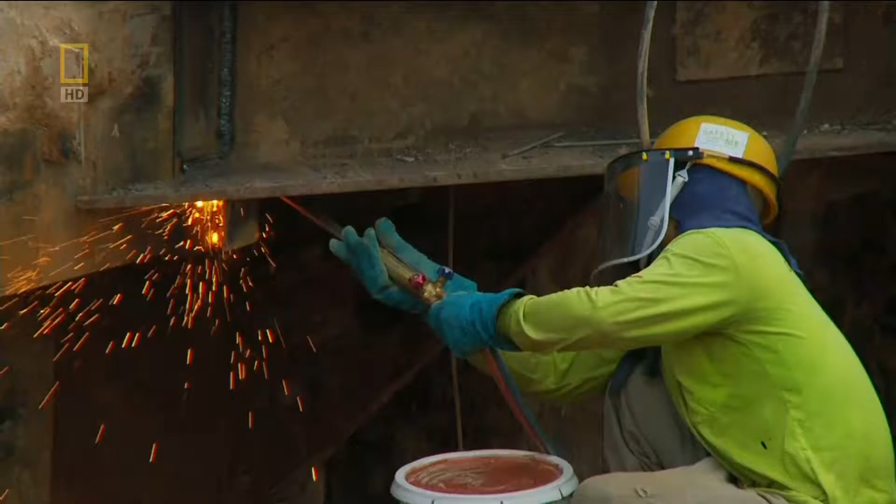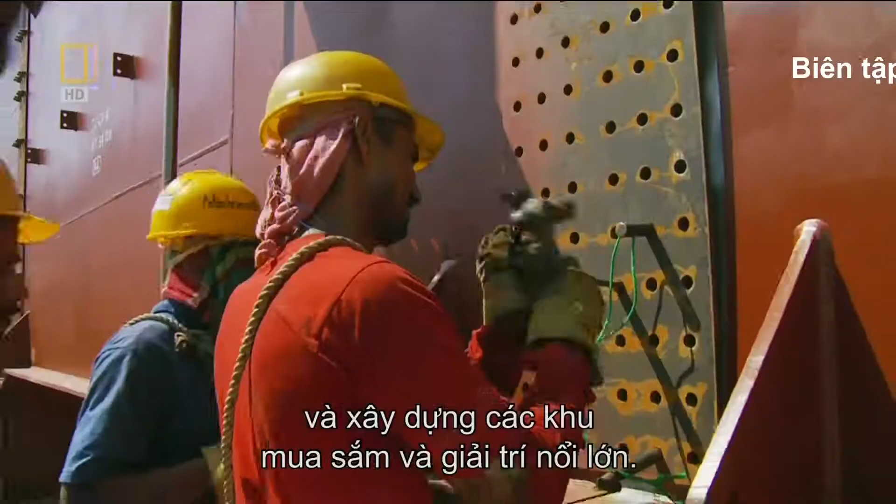Singapore's Marina Bay Sands is one of the world's most complicated construction projects. Engineers have to build not one, but 3 skyscrapers that will shoulder a sky park as big as an aircraft carrier. Worst case scenario, we get stuck. They have to devise ingenious solutions to assemble a 60-metre tall museum of impractical dimensions, install giant artworks, and erect seemingly floating pavilions for shopping and entertainment. If engineers succeed, they will create a virtual city unto itself.

Singapore, the Southeast Asian country, is smaller than New York City. The lack of space forces it to build its largest leisure and entertainment hub to date on a small tract of reclaimed waterfront land.

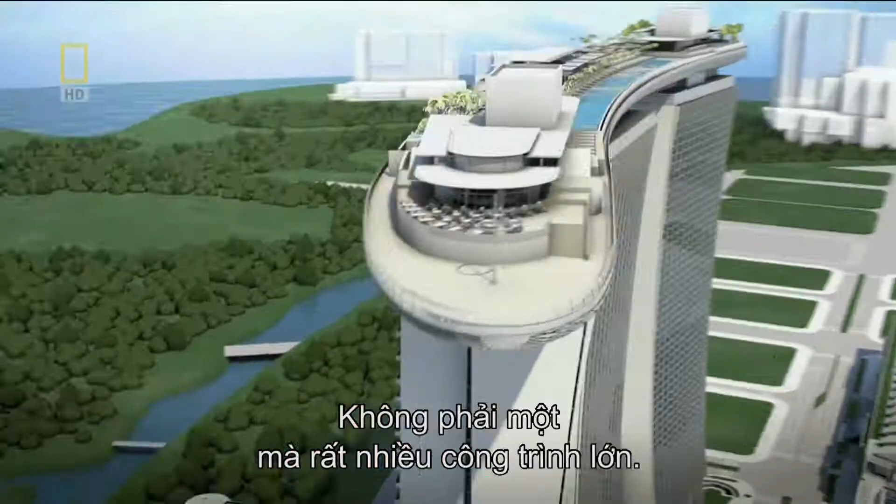The Marina Bay Sands. It's not one megastructure, but many. Serious challenges lie in the array of buildings that form the unique complex.

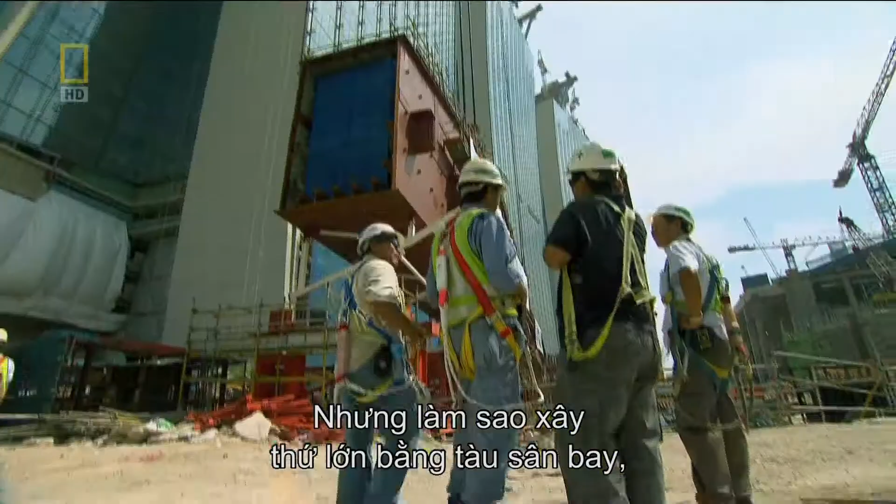3 55-story hotel towers slope at such great angles, they're in danger of buckling under their own weight. An even bigger problem is the hotel's roof. A 340-metre sky park spans its length, containing gardens, outdoor pools, and the world's largest cantilevered observation deck. But how do you build something as big as an aircraft carrier, 200 meters in the air?

In the hotel's atrium, mammoth works of art have to be somehow incorporated into the architecture. Its challenging centerpiece, a 15-ton mass of steel by a renegade artist from Britain.

A 60-metre tall art science museum is designed for maximum visual impact. It will be to Singapore what the Opera House is to Sydney. Only one problem: it seems too impractical to construct.

And a set of dramatic glass-encased pavilions, while themselves posing little challenge, have to be built in water.

The man behind the Marina Bay project understands the risks, but he believes that anything short of astounding will fail. Sheldon Adelson, one of the world's richest men and CEO of Las Vegas Sands Corporation: 'What we hope to accomplish is to change the face of Singapore tourism. So we expect a very successful development.'

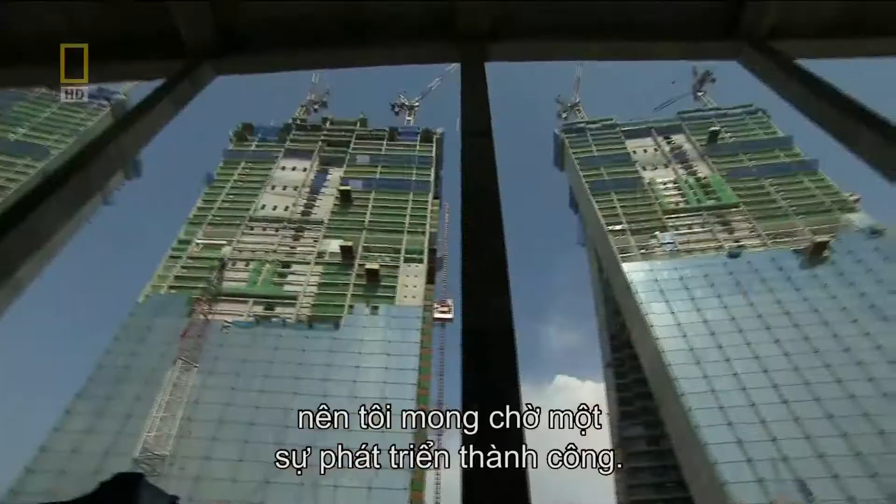That is by far the largest and most expensive single project we've ever undertaken. It'll cost about 5 to 5.5 billion US dollars. It's a lot of money. Now, I know $1 billion doesn't buy what it used to, but by any measurement, it's a lot of money today.

Adelson believes his huge investment is safe in the hands of Moshe Safdie, a world-renowned architect. Safdie is recognized for his use of dramatic curves and geometric patterns. The Marina Bay complex will be his largest and most difficult project yet.

I think that architecture has to be timeless. Therefore, what it espouses, what it provides, needs to be something that has a long life. What's unique about Marina Bay is all the pieces coming together. You can't think about it as individual buildings. You've got to think about it as a piece of city. It's much more a symphony than it is a sonata.

On the ground, engineers are more concerned about the reality of building Safdie's vision. This is the North Retail section area. 30-year veteran John Downs is in charge of overseeing the entire project. The design is very, very diverse, and each component of the project is totally different from the others.

For a project of this size, you'd expect with the planning, with the design, with the construction, you'd be expecting somewhere between 6 to 7 years. Here is basically a 3-year turnaround.

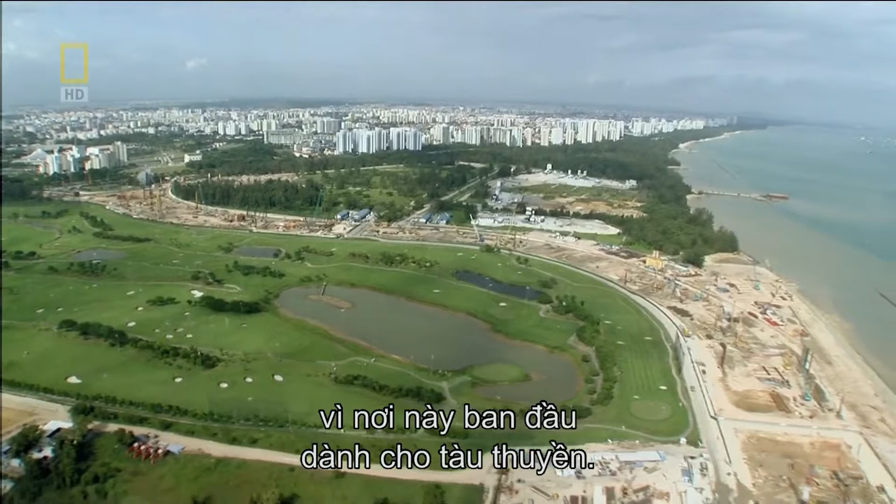The complex sits on 560,000 square meters of reclaimed land, part of a decade-long plan to revamp Marina Bay, a former saltwater estuary that's now a freshwater reservoir.

Beneath the reclaimed land, which is essentially a seabed, is a dangerous layer of marine clay. Sometimes called black toothpaste, marine clay has very poor structural properties. If not given complete respect, the unstable marine clay is potentially fatal.

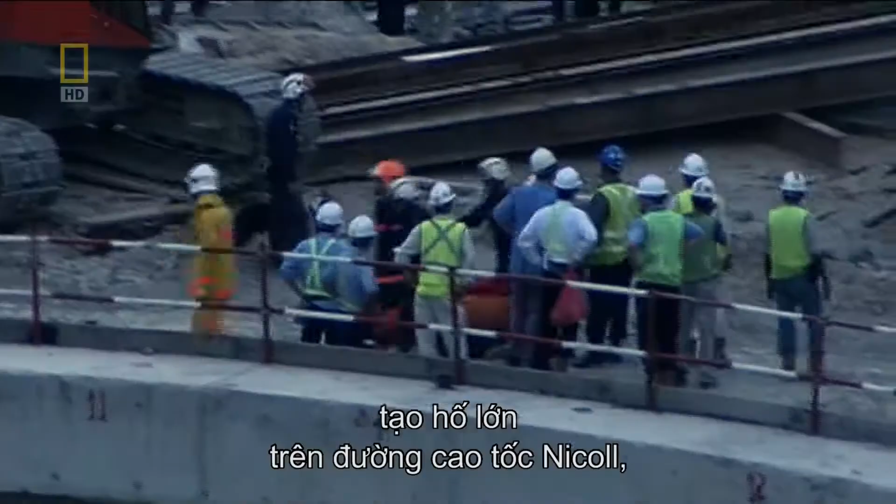In 2004, Singaporeans discovered the lethal consequences firsthand. A routine excavation in an underground tunnel for the mass rapid transit network causes a collapse, creating a gaping hole in the Nicoll Highway, killing 4 workers.

The ground conditions in which they were building the Nicoll Highway were not dissimilar to those in which we are encountering here. They had also soft clay, they had similar depths of excavation between 20 and 37 meters. One of the big things that was learnt in the Nicoll Highway collapse was the importance of monitoring movements and the control of quality as the construction proceeds.

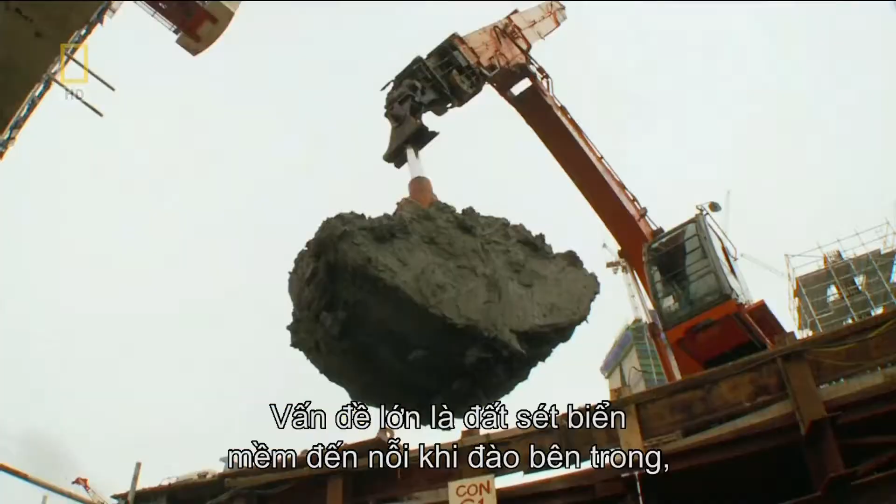Marine clay is an old foe of engineer Mike Barton. He's defeated it in the past by understanding how it behaves. The big problem with marine clay is that it is so soft that when you dig out the inside, the walls will move and potentially collapse and allow all the surrounding water in the bay into the excavation. So, before work can begin, the unstable building site needs major fortification.

To combat marine clay, engineers decide to build giant concrete walls to create stabilizing perimeters for the larger buildings, known as diaphragm walls. Up to 1.5 meters thick, diaphragm walls are steel-reinforced concrete sections, pounded 50 meters into the ground. They form watertight enclosures for men and machines to work round the clock. In just 1 year, over 4,000 meters of diaphragm walls help produce a rock-solid foundation.

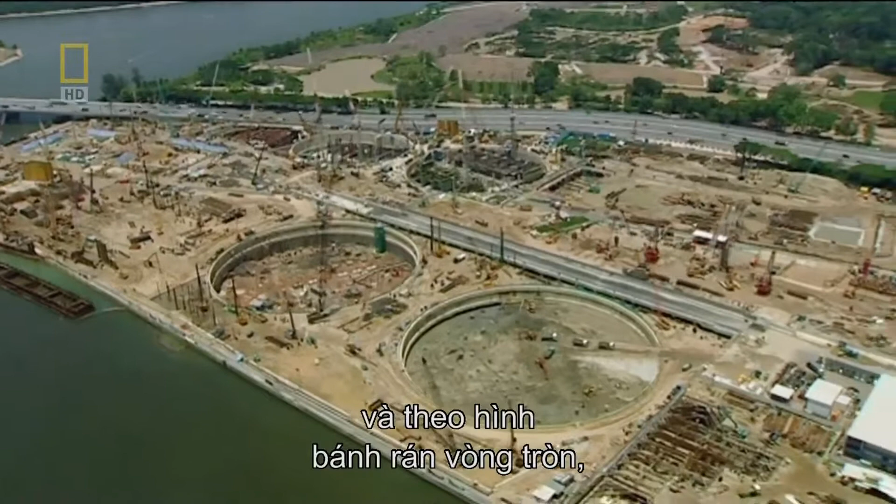The diaphragm walls that we constructed in a formation which we called a peanut formation, which is 2 circles joined together, and a donut formation, which is circular, is that they are able to withstand very, very large forces from the marine clay without any movement. They encapsulate an area that's bigger than a football pitch that enables us to excavate very quickly and to build structure up very quickly.

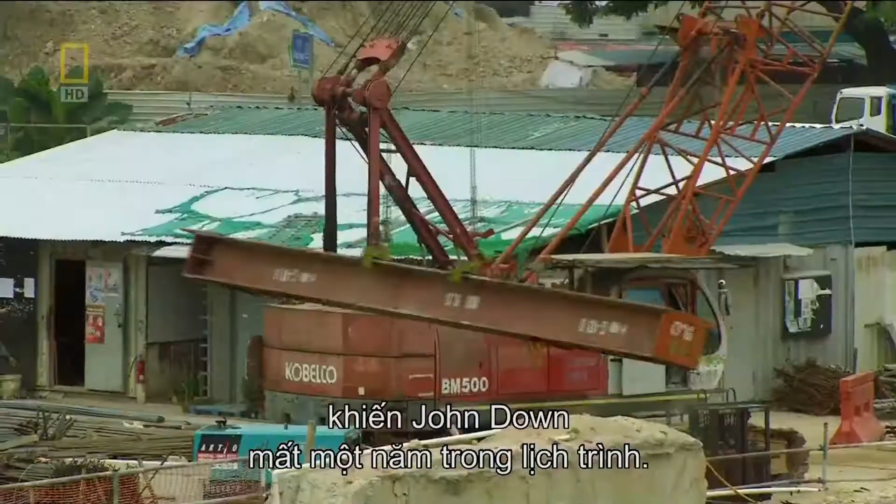Securing the footprint of the Marina Bay project has already taken a year out of John Downes' schedule. He now faces the difficult task of erecting the resort's many buildings in a space of just 2 years. Just managing the whole logistics of that, including the construction methodology, is very, very challenging for us. 1, 2, 3. To meet his tight deadline, Downes chooses the most direct solution. He hires 16,500 workers to construct every single building, simultaneously.

It's like leading a small army. So organizational excellence is key. We're just on the edge of Singapore in the CBD here, so rather than lose the contractors and the workforce to go off-site, we built our own 3-story project office. We have all of our contractors, our subcontractors here. We house our resident site staff. We have our project management team. We have our construction management team, our design management team, and the logistics here.

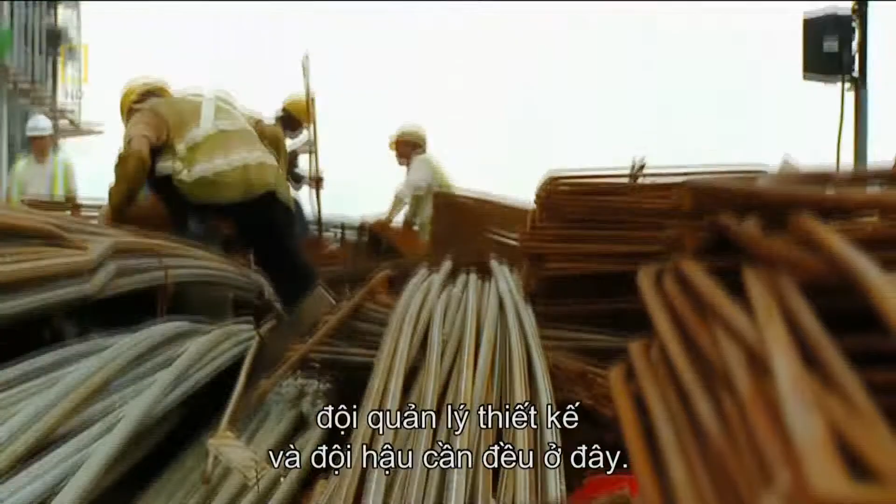The tight schedule also creates problems at the hotel towers, where engineers are already struggling with a congested site. The important thing to do is to make sure that they come in and deliver the goods straight away and then get out again. We don't want too many vehicles on site at the same time. To speed up construction and alleviate traffic congestion, engineers turn to a method that's proven itself countless times in the field: in situ concrete casting.

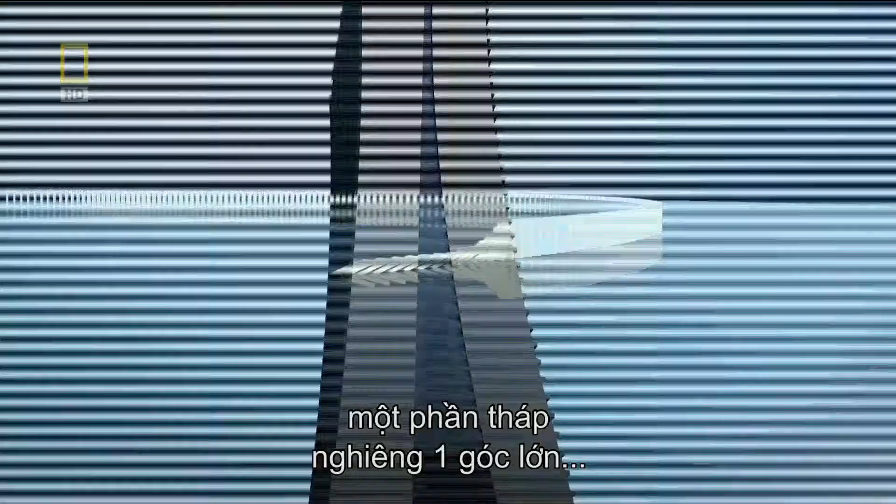Hotel walls are made on site in the thousands. And workers laying the floors are so proficient, they produce 1 floor per 4-day cycle. It's an impressive display for a conventional solution. But the structure they're attempting is anything but conventional. The key challenge of building the hotel towers is its unusual design. Unlike other skyscrapers, part of the towers slope at incredible inclines. Like a set of collapsing dominoes, the towers could buckle under their own weight if a practical building solution is not found.

It's a major concern for engineer Craig Glover. I've been in the industry for 25 years, done a wide range of projects in many different countries, but nothing compares to this whatsoever. There was nothing we could take reference from across the street, on the next high-rise, or across town. This is a new frontier. Costing a staggering $5.5 billion to build, the Marina Bay Sands could be one of the world's most expensive mistakes if engineers can't solve the tower's problematic structure.

Engineer V.C. Cheong leads the design team, and their solution comes out of left field. If you look at the configuration, it's not a straight tower. It's with a sloping leg. So all this sloping leg actually is inducing a very huge external force onto the structure. We kind of built it without any support. So we actually formulate a solution to prop up the sloping edge. Using a technique they've never employed before, engineers build large temporary struts made of strong structural steel. They prop up the sloping towers as they rise.

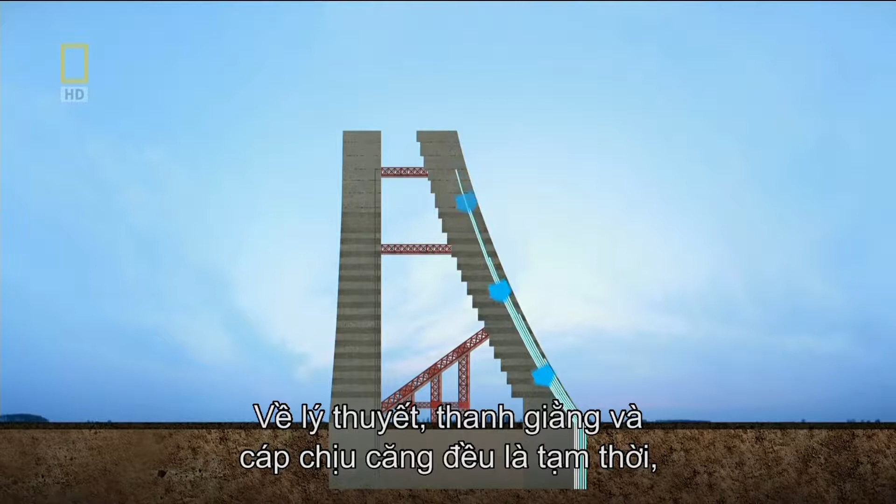Like a suspension bridge, high-tensile steel tendons, also known as tension cables, give an added layer of support inside the walls. In theory, both the struts and the tension cables are temporary and will be removed once giant link trusses connect the towers at the 23rd floor. The sheer weight in concrete is enough to topple the towers at level 8 if the engineers' calculations are wrong. To reduce the chances of failure, Glover and his team make a radical decision. Instead of removing the temporary tension cables in the tower walls, they make them permanent supports.

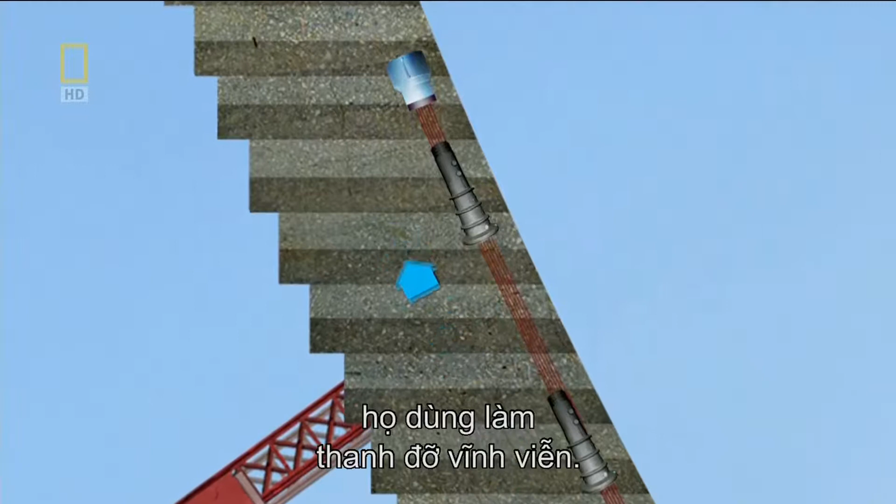I feel good it's in there because it's added strength, it's added support. We have a twined network here of high-strength steel. And what we do is we bundle these up so they form a cord with multiple strands inside this conduit. We place this conduit inside the walls prior to casting the concrete. So what we then do is once the concrete is cast, we anchor one end into the concrete.

So we then put a very high-strength hydraulic jack onto the collar and one by one pull these strands through and tension them up. What that does is basically pull the building back and hold it in place. If these cables were to suddenly break or if they weren't in place, we wouldn't be able to control the self-weight as we build more and more of the building up.

Despite the team's quick thinking, the true test of their engineering decisions will only happen once the main support struts are removed and the massive link trusses installed. Link trusses are huge reinforced steel brackets that bind the towers at the 23rd floor.

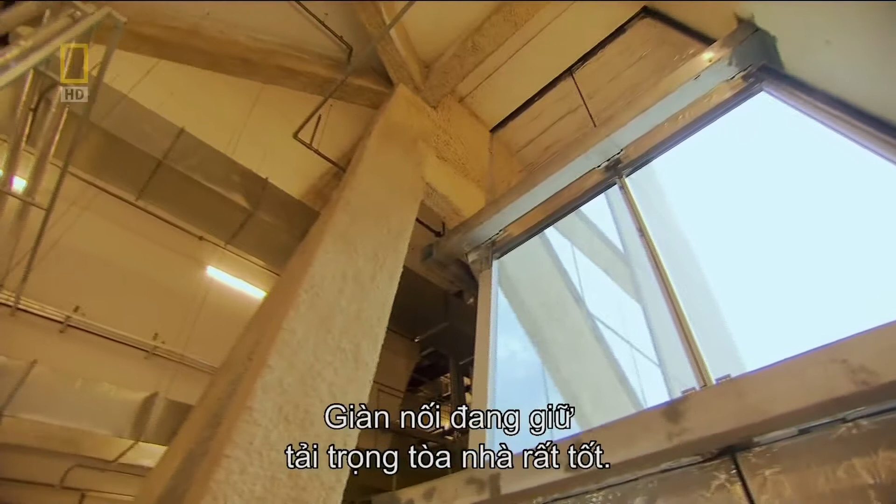Once their installation is complete, they transfer the sloping tower's weight completely away from its temporary struts. Once we're satisfied that we don't have any stability issues, then we can bring the large hydraulic cranes in and member by member start to dismantle the struts. We've got a lot of time pressure, so we've just got to make sure that these things keep moving. As the last pieces of support struts leave the site, Glover and his team can finally breathe a sigh of relief. The link trusses are holding the building load. So far, so good.

Not all the structures have ended up according to plan. The 60-metre-high Art Science Museum is facing a major design overhaul. Planned as a venue for blockbuster exhibitions on the arts and sciences, its bowl-shaped roof doubles as a 3,000-seat amphitheatre. Unfortunately for engineers eager to start its construction, architect Moshe Safdie isn't happy with its current shape. Somebody looked at them and said, looks like a bunch of bananas. In fact, Mr. Adelson said, looks like a bunch of bananas. I said, well, if they look like a bunch of bananas, we're not there yet.

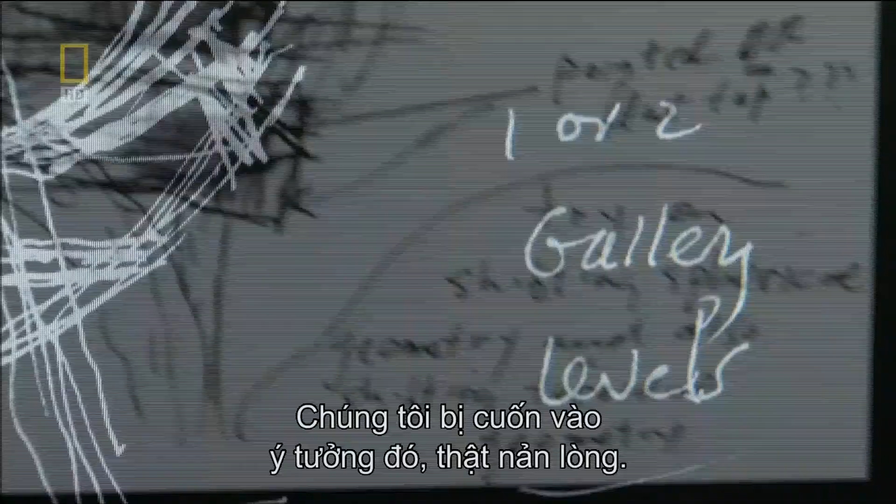It's terrible news for Safdie's design team, especially its principal, Gene Dyer. There are times that Moshe will come in with an idea. We think it's quite exciting. We'll pursue the idea for weeks or even months. He'll come back and say, I want to change the idea. And we've already bought into the idea, so it's a bit frustrating.

To rework the unique geometry and dimensions of the Art Science Museum, Dyer and his team turned to advanced 3D modeling programs. It not only makes navigating the museum's complex geometric patterns easier, it shortens the process to a matter of days. The model is dynamic and it can be moved by just changing one or two elements. Moshe could experiment. He could make rapid judgments in a very short period of time about which way he wanted to take the project. This is a process that was impossible to do 10 years ago. Without the computer, this would take years and years and years.

After months of refining the design, Safdie is finally happy with the result. The mathematical precision that we gave them made them even more beautiful. It led some people to say, well, hand of welcome. Others said, is that a lotus? And the more ambiguous the associations, the closer I thought we were getting to our target. Because I think the least exciting buildings are those which have overt symbolic associations.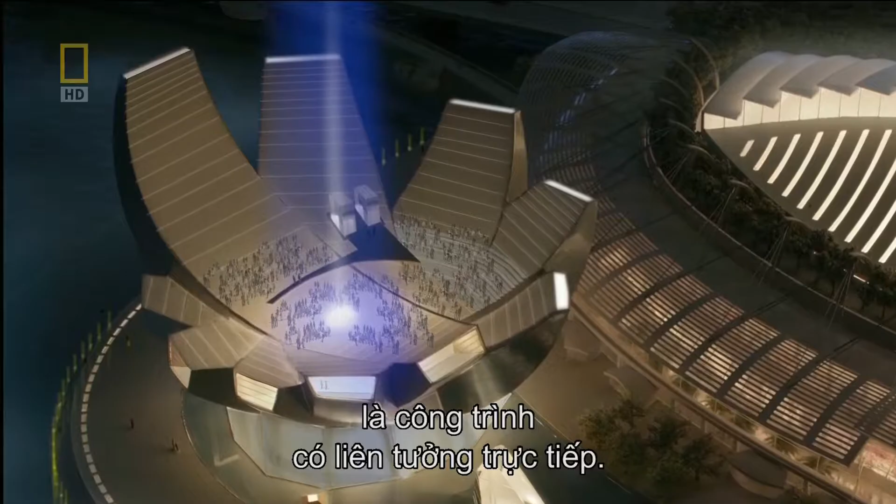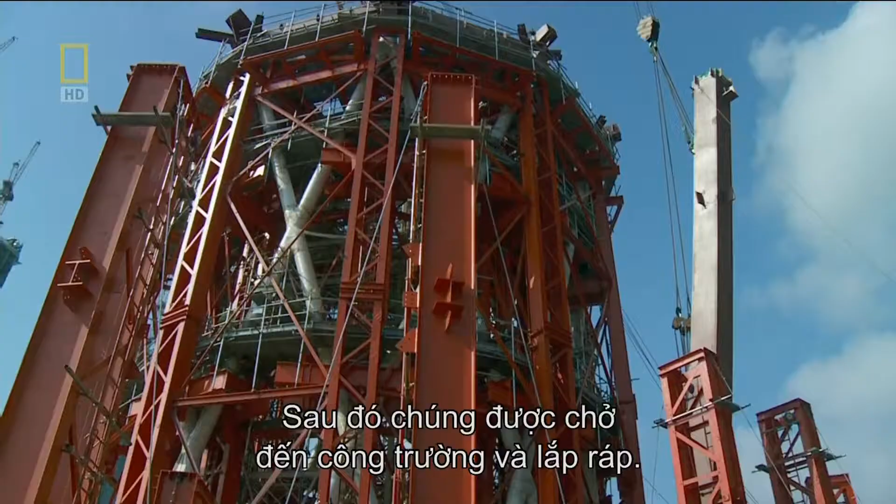Armed with the new design, engineers begin work on the museum's 60-metre-high superstructure. A staggering 5,600 steel elements, weighing some 5,200 tons, are prefabricated to exact specifications. They are then trucked onto site and assembled. It's like putting together a giant jigsaw puzzle. Each element has to be installed with pinpoint accuracy. If it's even a few millimeters off, engineers will have to start from scratch.

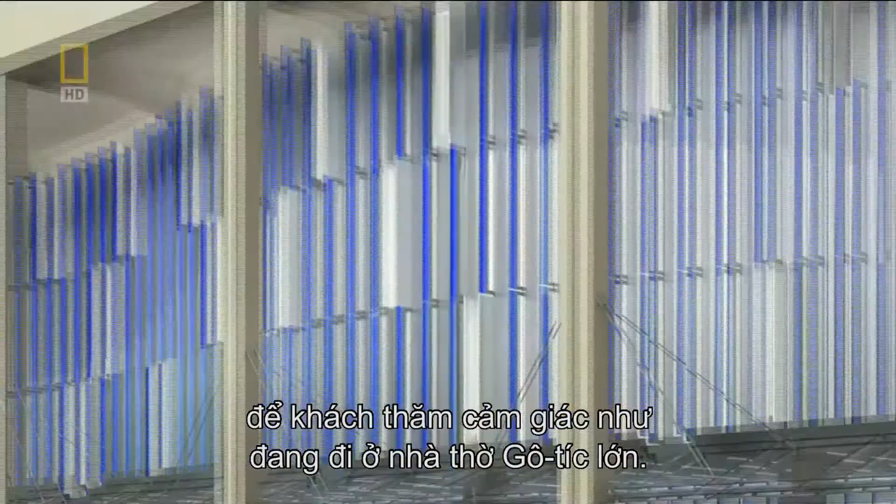Engineers of the massive atrium at the base of the towers are facing an equally tough construction process. Safdie has come up with a challenging design. He wants to inject art into the atrium's architecture, so that visitors will feel like they're walking through a grand Gothic cathedral. In medieval times, if you think of a Gothic cathedral, there's the architecture, there's the stained glass windows, there's the sculptures on the pinnacles. You cannot draw a line and say art and architecture. Art and architecture are one, they're singular experiences. And I think what we try to do here is come back to this integrative mode.

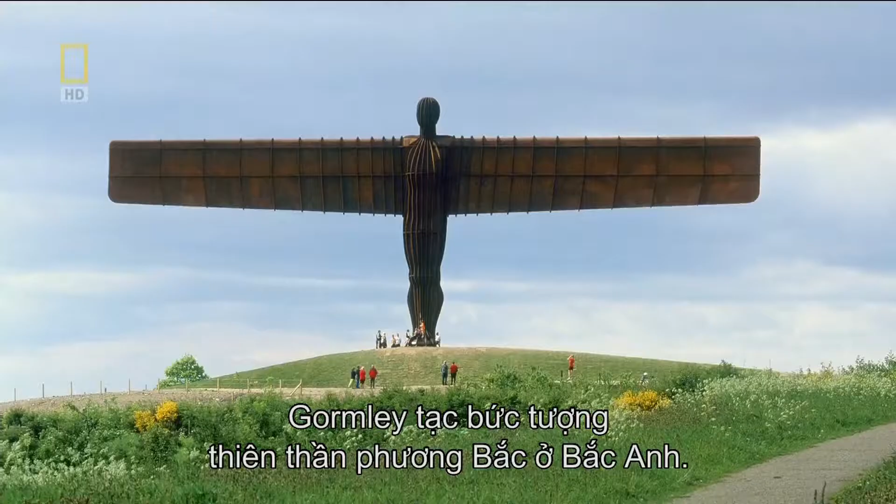To create the centerpiece of his vision for the atrium, Safdie commissions renowned British sculptor Antony Gormley. Famous for his unusual approach to art, Gormley is the brains behind the Angel of the North sculpture in northern England. What he's about to attempt is proving to be more of a construction challenge than an artistic one. A cloud-like sculpture some 40 meters long, made up of 15 tons of high-grade stainless steel, hung 12 stories above the atrium.

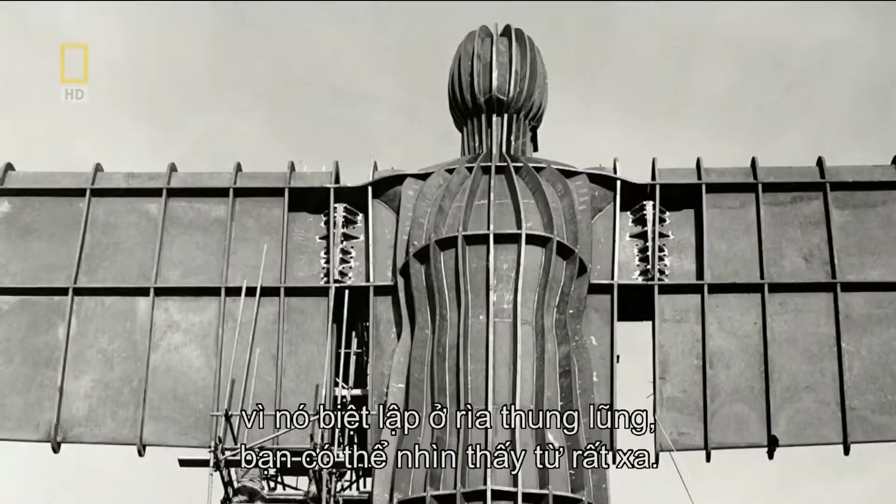The Angel of the North is, in a way, making a very traditional public sculpture because it's isolated in space at the edge of a valley. You can see it for miles and miles. It's very much about occupying space. This is about activating space. But just as they're about to begin construction, a bombshell drops.

September 2008. A global financial crisis wreaks havoc on markets. The flow of the hundreds of millions of dollars that keep the Marina Bay project going every month suddenly stops. For engineer Matthew Pryor, it's a massive blow. I feel devastated. I mean, it couldn't be worse. Probably the worst day of my life professionally. There's no more money coming through. So unless we put some funding in place or there's something, we're going to have to shut the jobs down. It is a tough decision to be made, and we don't know what we're going to do just at this point in time.

With the future of the multi-billion-dollar project plunged into doubt, all eyes turn to the man behind it, Sheldon Adelson. The next move of one of the world's richest men will determine the fate of the mega construction site.

The 2008 global financial meltdown is a haunting echo of the 1990s Asian crisis. Back then, progress on Shanghai's World Financial Center came to a complete halt for 5 years. For Adelson, that's simply not an option for the high-profile Marina Bay resort. His vision of changing the face of Singapore tourism is at stake, and so are billions of dollars of investment from his Las Vegas Sands Corporation.

He prefers finding a stopgap solution to weather the storm. Throughout history, there has never been a trend that went straight up, nor a trend that went straight down. So it goes up and down. It's only a matter of time when things will recover. In a bold move, Adelson pledges his vast personal wealth to the completion of the project, effectively ending any speculation of failure.

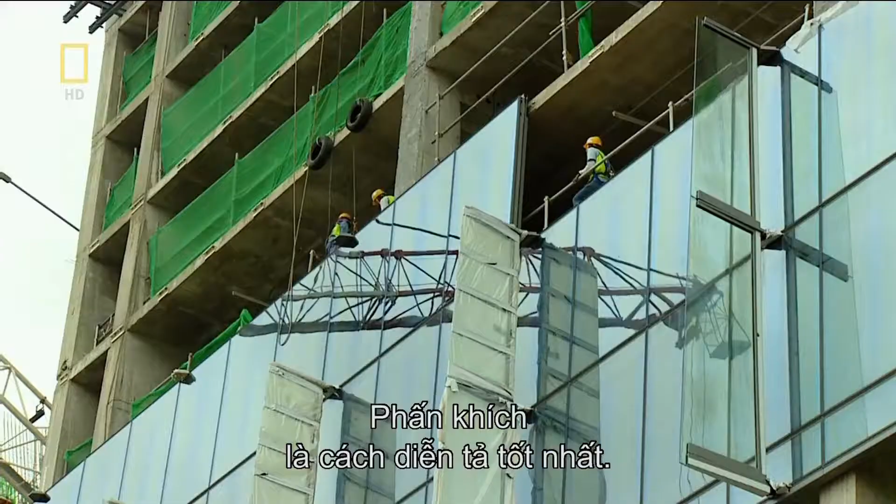There's a massive sense of relief in the company. I mean, everyone pleasantly surprised how quickly we've got through this and the fact we could hold it together and get it going again. So euphoria is probably the best way to describe it. With the crisis averted, construction on the 3 55-story hotel towers, the casino, theatres and convention centre resumes at pace. Everywhere you turn, steel is being installed. It's vital reinforcement for every concrete structure on the 15.5-hectare site.

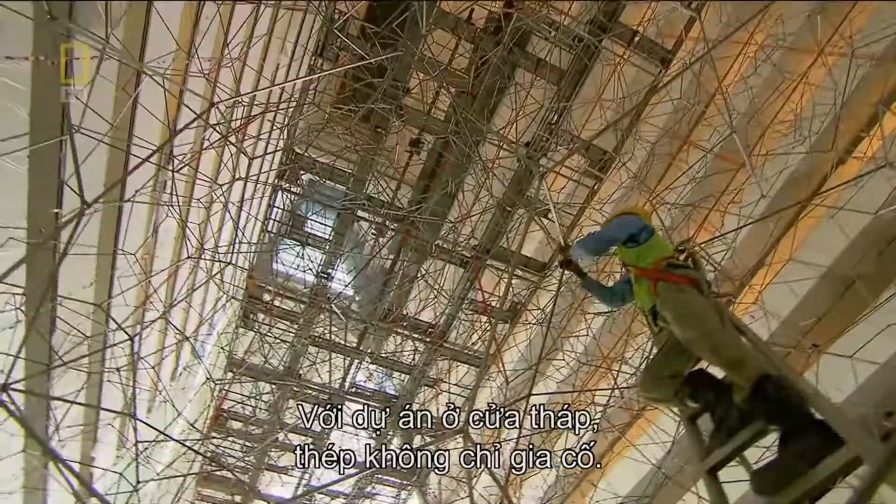For one project at the tower's atrium, steel is more than just reinforcement. To construct the 15-ton Drift sculpture by British artist Antony Gormley, engineers had to first laboriously prefabricate it into over 70 segments. The segments are then welded into 8 slices and will ultimately form the sculpture. It's a tricky operation, but engineers are able to complete it swiftly due to a system of codes and numbers that enable them to quickly identify what goes where.

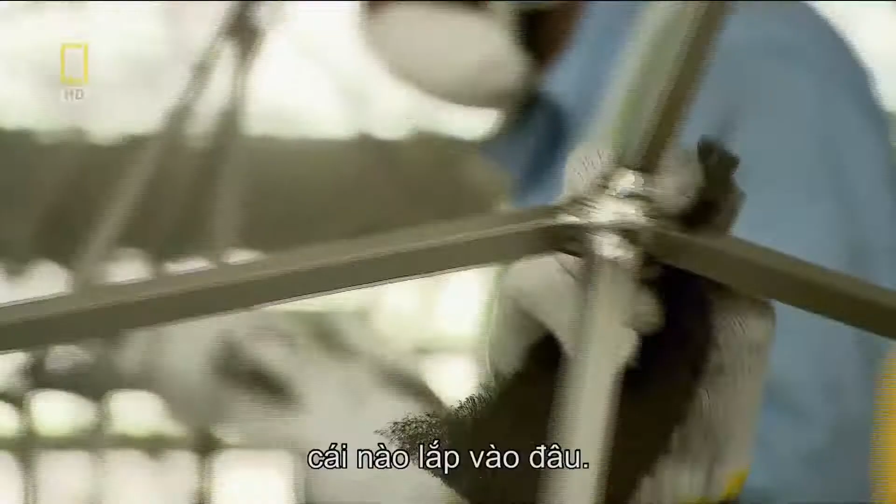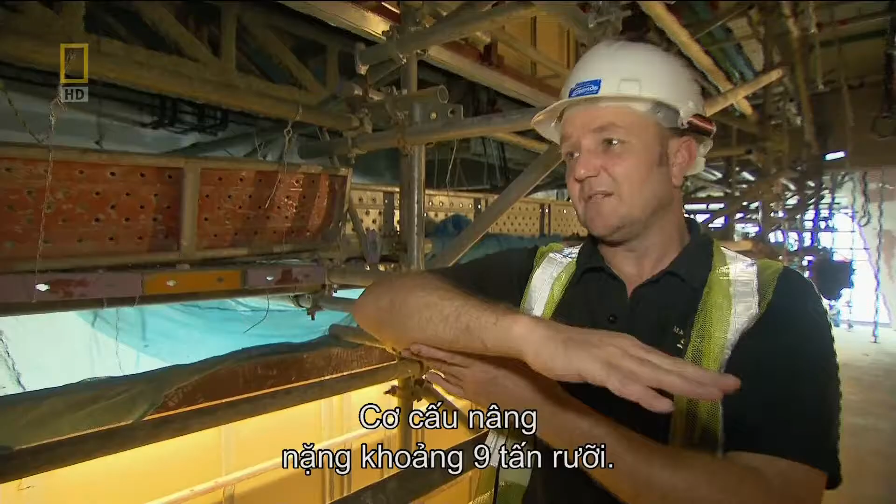Once all 8 slices of Drift are fully assembled, it's lifted up into position by a temporary lifting frame. A massive box truss on the atrium ceiling then takes over the load. In theory, the box truss will support the weight of the lifting frame as it's being lowered down. It will be a heart-stopping moment, especially for engineer Graham Stephenson. The lifting frame is about 9.5 tons, so when it picks up and gets some momentum, there's a potential that it just wants to flick over and rotate through its full 90 degrees, and we won't have it under control.

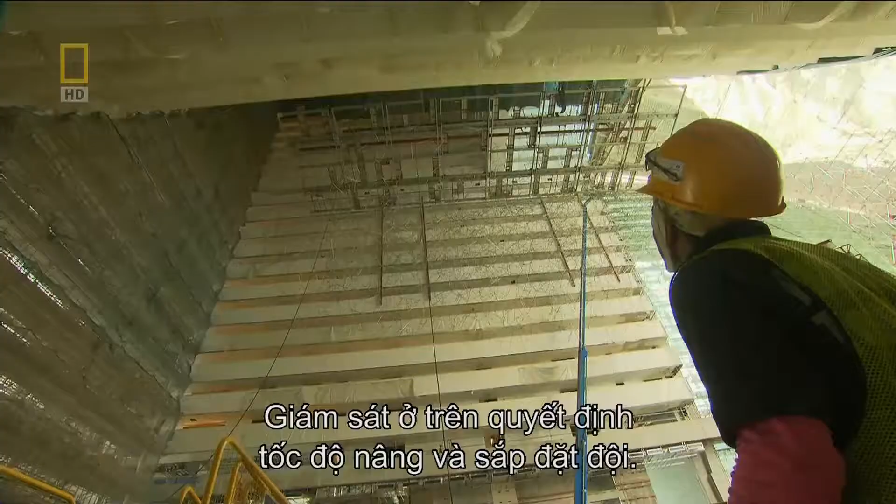Stephenson's solution: 4 powerful automated hoisting drums located at the 4 corners of the frame. They allow workers to control the strength and speed of the operation with high tensile steel cables. A spotter at the top determines the pace of the procedure and marshals the team. The entire operation is estimated to take up to 10 hours to complete. As soon as the frame is in motion, there's no turning back. Midway through the lift, Stephenson receives reports of a potential problem.

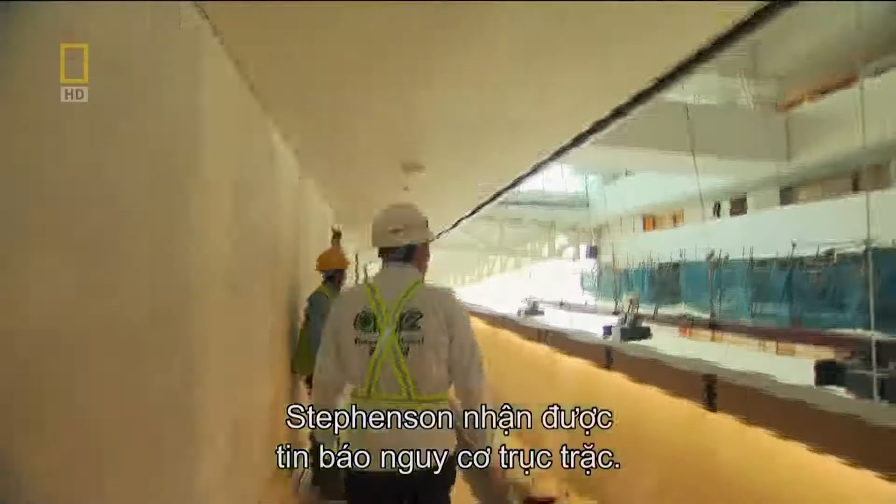22nd story, number 7 temporary cable, scaffolding touching the cable. Why you got the temporary cable touching to the transverse. Yeah, but is it just the end of a tube? Yeah. So you can just cut the tube? Yeah. Problem solved. But what was previously an estimated 10-hour procedure now turns out to be a 24-hour marathon lift. At 6 a.m. the following morning, they complete the job. Absolutely fantastic. The Gormley is now finally in its final position, so really an end of a long and exhausting day, and big thanks to everybody, but it's finally done.

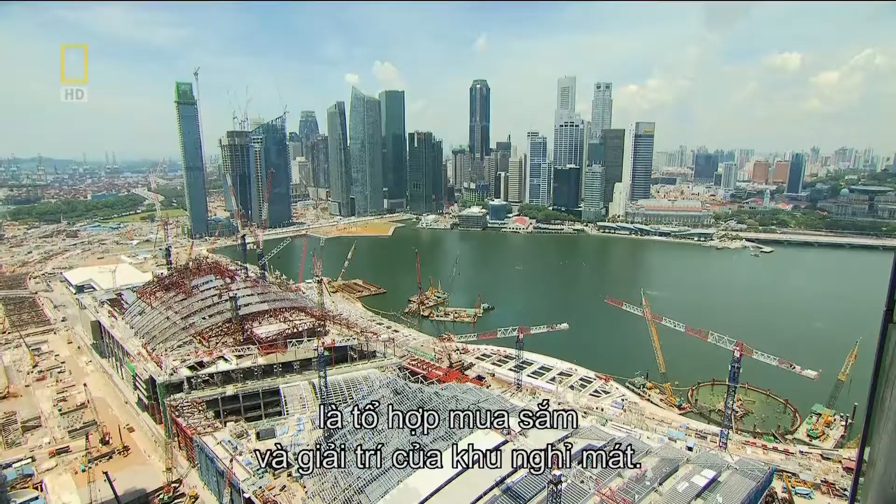While Drift settles into its new home at the hotel atrium, elsewhere attention is focused on one of the project's key features: the Crystal Pavilions. The 2 glass-encased buildings by the promenade are set to be the resort's premier shopping and entertainment complexes. But before engineers can make them a reality, they have to secure their footprint. And already a major obstacle threatens to sink their objective. The Crystal Pavilions are situated within the confines of Marina Bay. So to found it, engineers have to find a way to build in 6 meters of water.

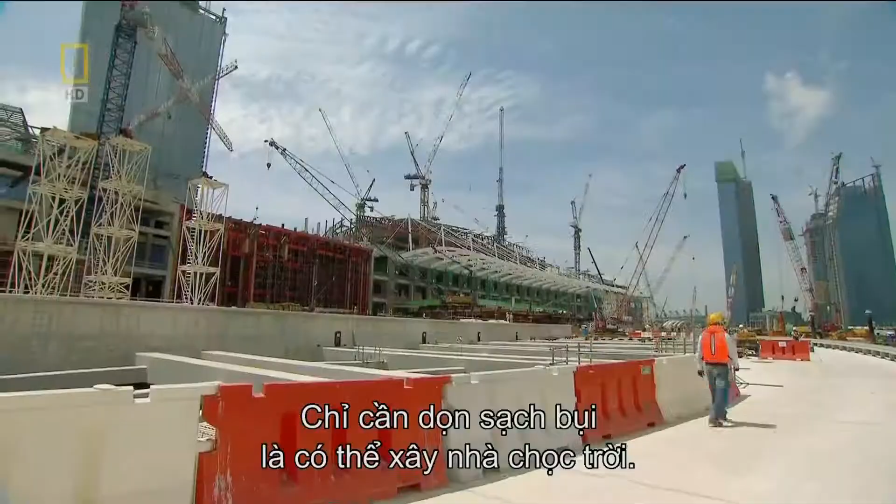The responsibility of tackling the problem falls on the shoulders of engineer Kurt Vella. I'm from Sydney. The underlying foundation in Sydney is sandstone, it's rock. All you need to do is just dust off the surface and you can build skyscrapers on it. Here it's very different. All the structures have to be heavily founded. To keep water out of the construction site, only one solution seems viable for Vella and his team: a waterproof steel structure called a cofferdam.

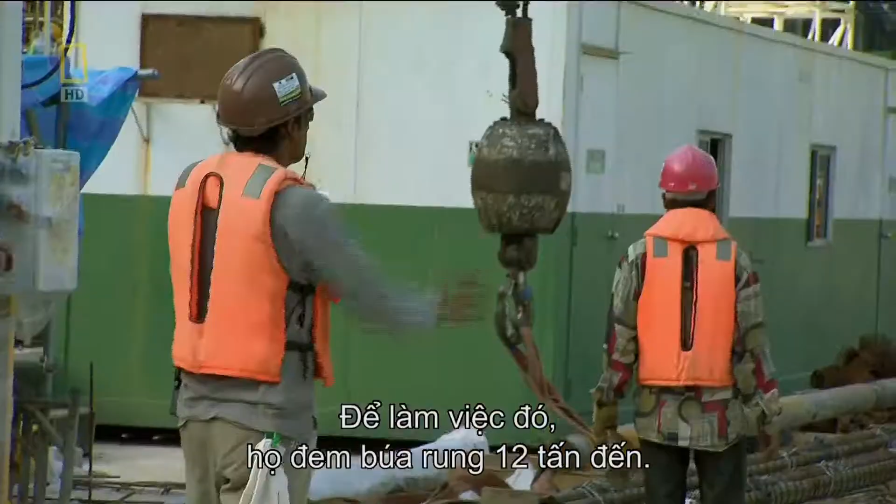This temporary formation surrounds the worksite with a circle of steel sheet piles, creating an impenetrable shield that locks out the water, keeping the workers safe within. For the job, they rope in a 12-ton vibro hammer. It punches the sheet piles deep into the earth, making the cofferdam rock solid and resistant to movement.

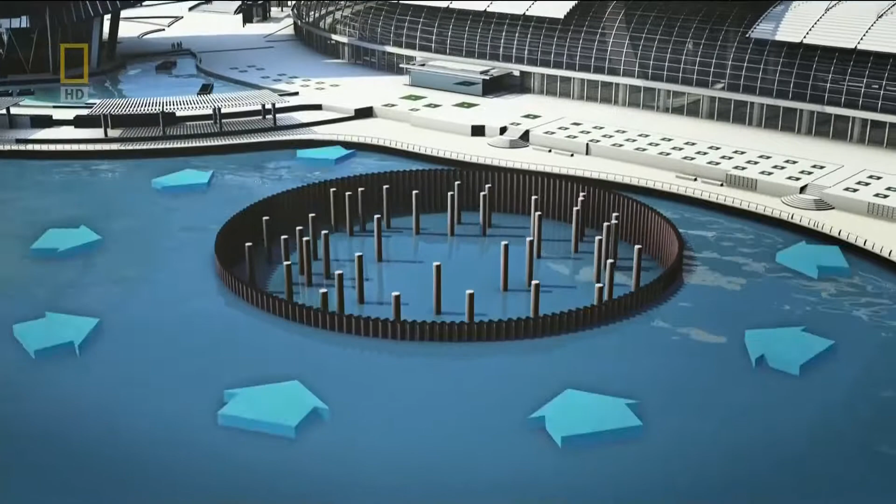With the cofferdam secured, engineers deploy powerful diesel pumps and run them 24 hours a day, ejecting any water that remains within the walls. This last step comes with inherent dangers. The force of the water outside creates what engineers call hydrostatic pressure. In theory, it's powerful enough to force water through any gaps in the cofferdam.

It's something that Vella prays will not happen. There's a bit of hesitancy and concern because we've got to build this building in the middle of Marina Bay. Everybody can see what we're doing, so if it leaks, it's a problem. If it fails, if it moves, if it collapses, it'll be an absolute catastrophe. After a day of pumping, Vella's worst fear comes true. Parts of the cofferdam are leaking.

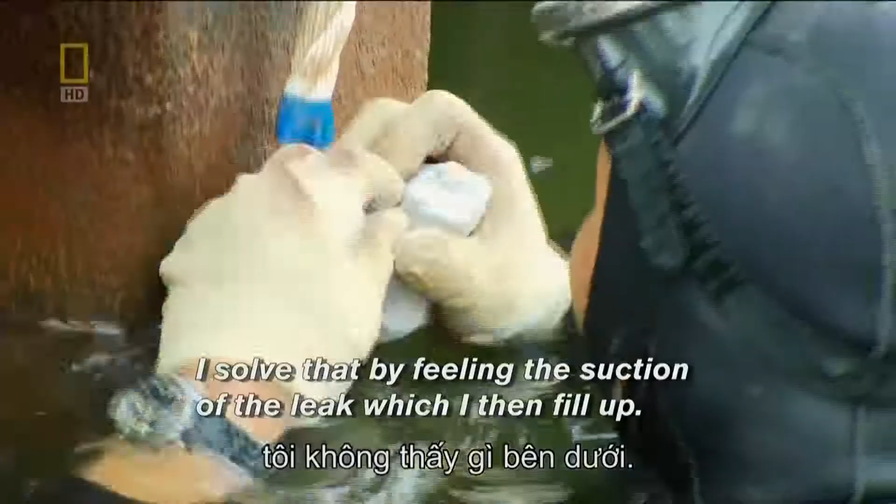To rectify the problem, Vella orders a team of 8 divers into the water on 10-hour shifts. Their mission? Find out where the water is being forced in and plug them shut with epoxy resin. Anson Lee is an 8-year diving veteran. The toughest part of my job is the environment. The visibility is poor here. It's totally zero, I cannot see anything here below. I solve that by feeling the suction of the leak which I then fill up.

You have to overcome all the fear that you can't see under the water, but okay, I feel proud to be one of this team to build this thing out. After 2 weeks of hard work by divers and the pump crew, the job is finally complete. After 2 years of battling the elements and overcoming difficult construction milestones, the 3 sloping towers of Marina Bay Sands can finally celebrate their topping off ceremony and move on to the next phase.

But a destructive force of nature threatens to throw a spanner in the works. With climate change predicted to affect the pattern of Southeast Asia's typhoons, Singapore may one day experience the destructive tropical storms plaguing its northern neighbors in the Philippines and Taiwan. When that happens, typhoon-force winds could spell disaster for the hotel towers, especially the 340-meter sky park sitting on top of it. The force of the wind can make both buildings sway dangerously, causing irreparable damage to the structures.

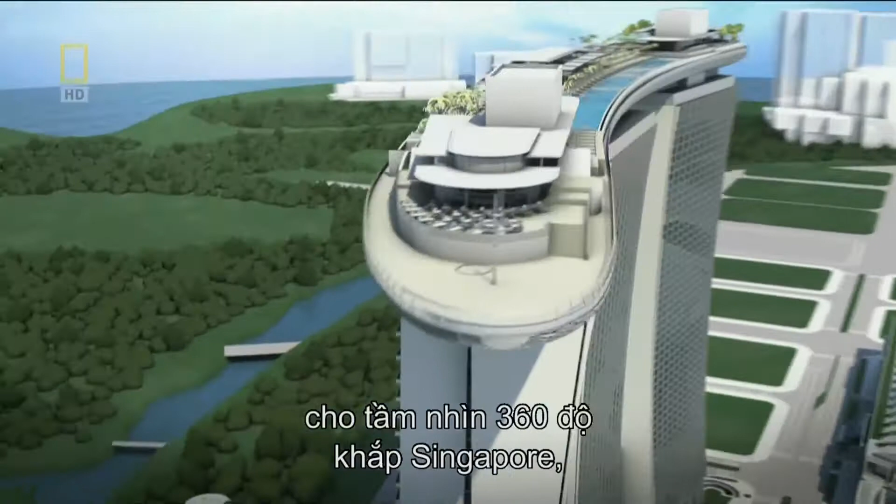The Sky Park, offering 360-degree views of Singapore. The visionary design will have enough surface area to park 4.5 Airbus A380s. But when architect Moshe Safdie first mooted it, it stemmed from a purely functional need. Luxury hotels, as we think of them, always have lots of open space around them, gardens, at least in the kind of tradition. But we didn't have much space left.

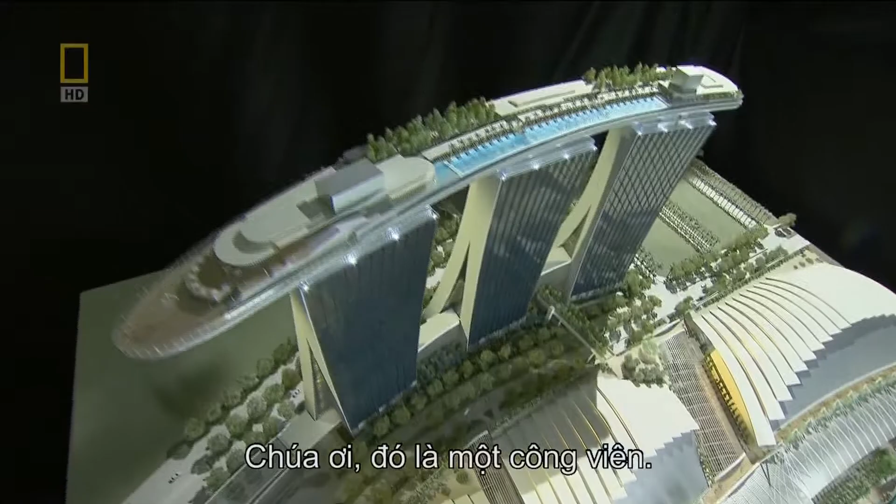Typhoon-force winds threaten to rock the towers and its sky park, causing unimaginable damage. If engineers are to make the building a reality, they'll need a rock-solid solution. Still got to do all this cladding. Engineer Tony McKee has little time to make things happen. At the moment, we're running a couple of weeks behind what we'd originally planned. We're not entirely happy about it, but at the end of the day, we've got to do this safe and we've got to do it properly.

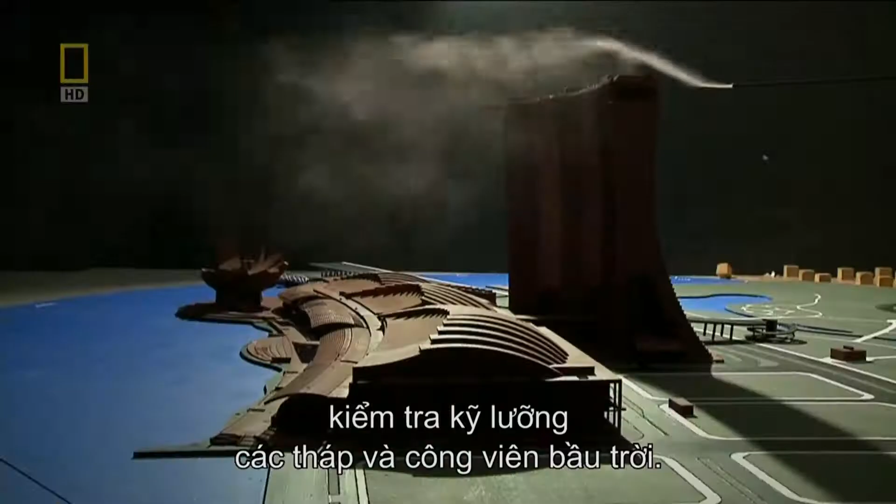To fight the enemy, McKee knows he has to first understand the enemy. He hires leading US wind engineers CPP to carry out extensive testing on the towers and Sky Park. Their mission? Find out how Singapore's potential wind forces affect the buildings. Wind engineer Roy Denoon oversees the process at their state-of-the-art wind tunnel in Fort Collins, Colorado.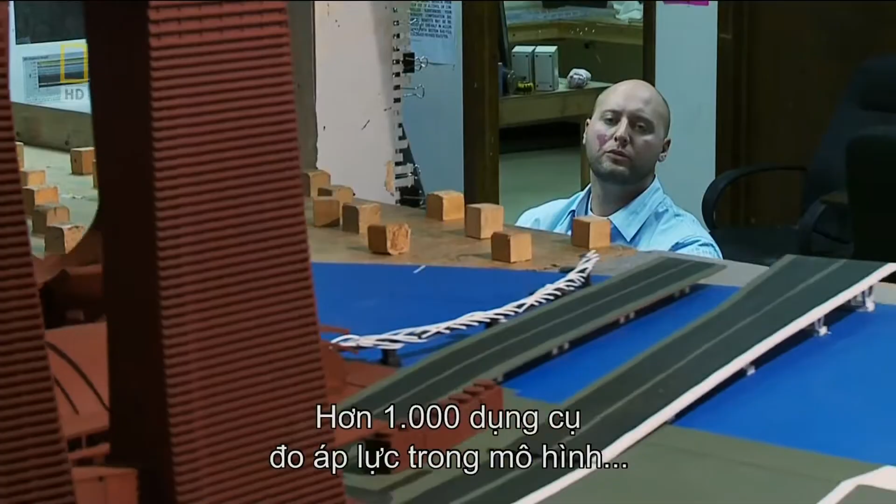During the tests, a scale model of the Marina Bay Towers is blasted with 40km/h winds to simulate faster typhoon winds in reality. Over 1,000 pressure measuring instruments inside the model register how the winds affect the buildings. At the end of the tests, engineers confirm that the three towers can deform by some 200 millimeters during the fiercest storm. Engineers quickly figure out a solution: movement joints.

Inspired by bridge engineering philosophy, movement joints are essentially gaps located between the concrete towers. The huge gaps allow for movements of up to 250 millimeters. Aluminium and stainless steel plates act as sliding components. They can move back and forward over each other, a little bit like you'd see in a flexible bus, where you have that articulation happening in the middle. It's a similar concept to that. To accommodate the differing movements of the three towers, engineers install multi-directional steel bearings below the Sky Park.

Armed with the final results, McKee can now safely begin construction of the Sky Park. Consisting of some 10,000 tons of steel, the Sky Park is as big as an aircraft carrier. The most practical way for engineers to construct it is to break it into 14 segments on the ground before assembling it at the top of the towers. There's no room for miscalculation at 200 meters in the air.

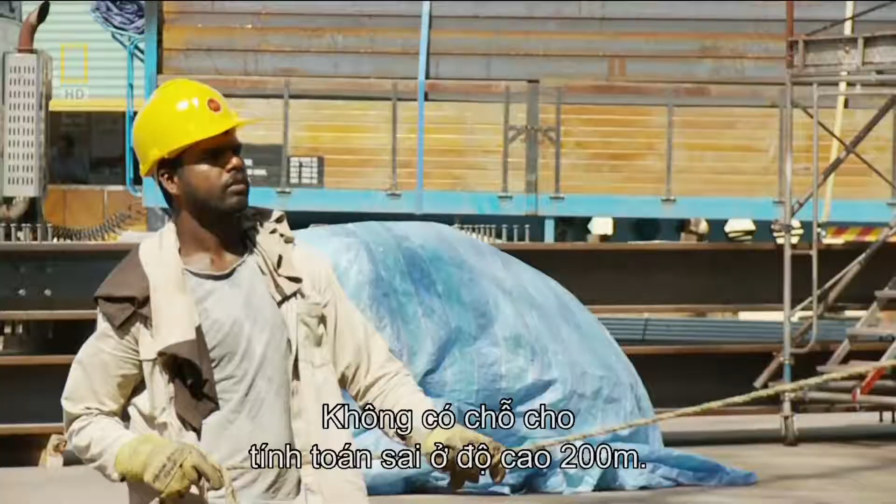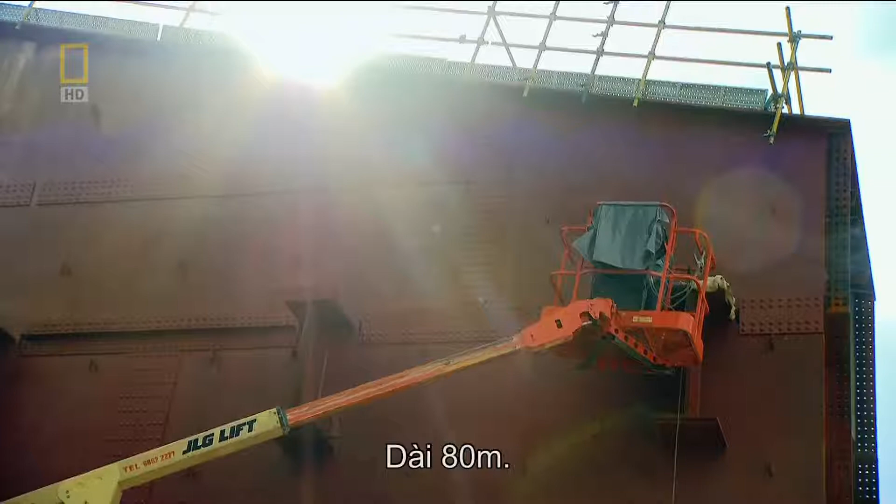Each segment is carefully prefabricated and tested by steel specialists Yongnam, and then trucked to the site independently. From the very beginning, McKee and his team anticipate that their biggest challenge will be lifting the two largest segments of the Sky Park, the box girders. Measuring 80 meters long, their combined weight is a staggering 1,400 tons.

How do we feel? A little bit of apprehension. You know, it's a significant lift that hasn't been done before. If something goes wrong, it could be really significant for us. To reduce risks, McKee turns once again to proven bridge building technology. In a process known as strand jacking, giant temporary lifting gantries made of strong structural steel will use powerful hydraulic jacks to lift the box girders up to the top of the towers before sliding them into place.

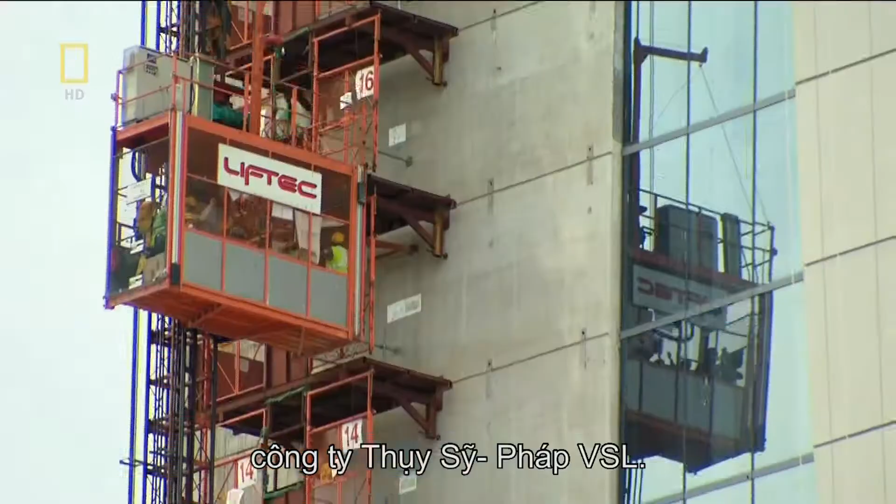It will be the longest and largest lift of its kind in the world, and McKee needs the best in the business. He puts a pioneer in the field in charge: Swiss-French company VSL. Engineer Eddie McKee and his team have successfully raised bridges, stadium roofs, and even Ferris wheels. The toughest part of my work is to plan everything very precisely, because everything is set up in millimeters. So we have to lift up and slide it in and position it in 5 or 10 millimeter accuracies. If we don't do it properly or safely, the biggest hazard is the thing can fall down to the ground.

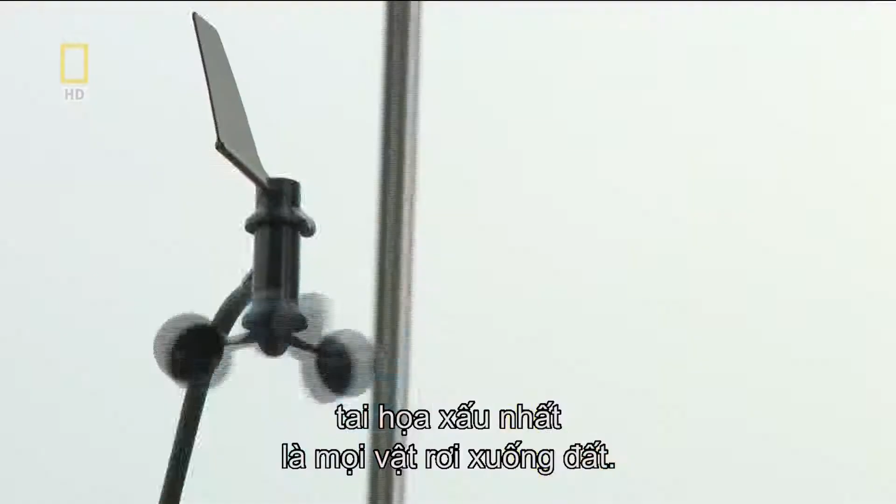Other factors further complicate the lifting process. Due to an increasingly tight schedule, the team is forced to conduct the lift during Singapore's annual monsoon season. It's almost impossible to predict when a tropical storm will hit. When it does, the accompanying lightning strikes can endanger lives. And because the whole operation takes place meters from a jam-packed highway, curious onlookers will be able to see any mistakes the engineers make. It's a potential public relations nightmare. Okay, now I start now.

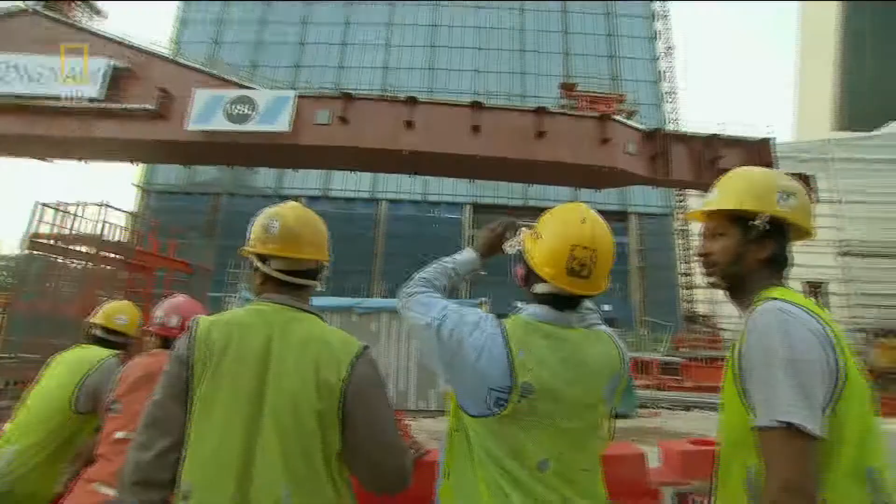During an estimated 16-hour lift, the box girders will move at a cautious 14 meters per hour. Eddie McKee and his team constantly check their weather gauges for any incoming storms. The hydraulic jacks are also inspected regularly for overheating. No one wants the operation to stall in mid-air. Today, point 1 to point 4. 288. Oh, that one, this one. Change to channel 2, yeah?

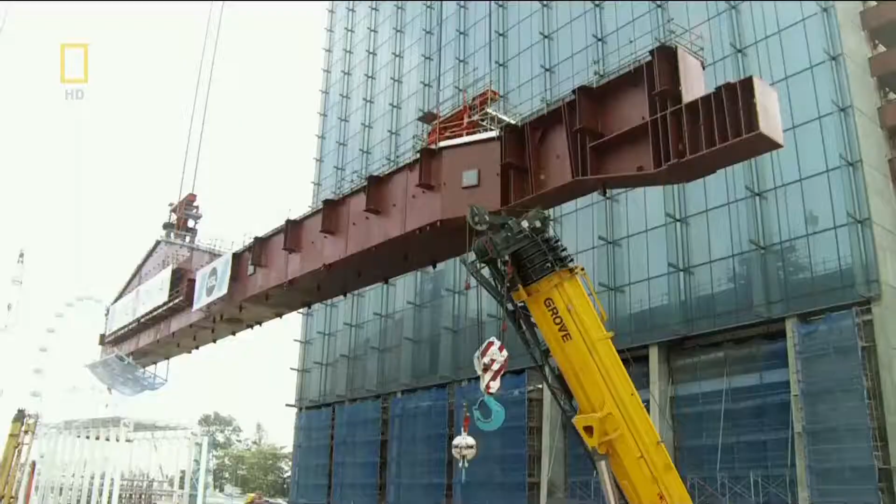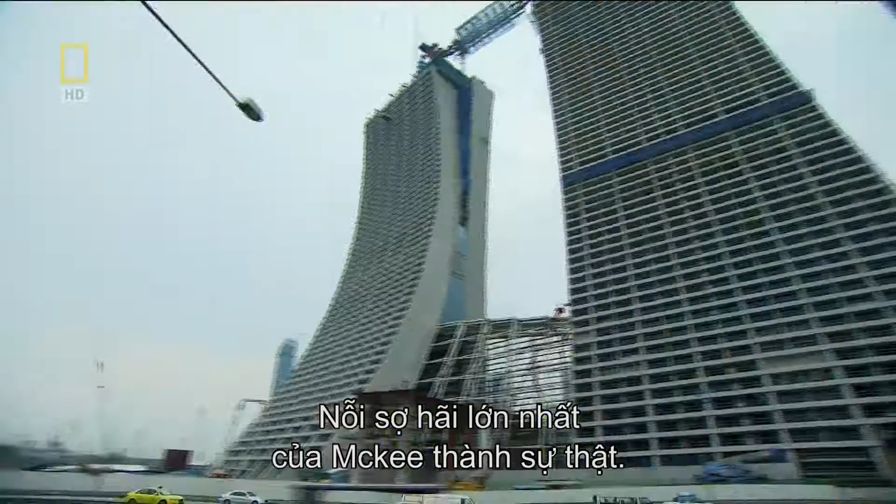Despite the team's best efforts, Mother Nature catches them by surprise. Okay guys, rain is coming. It's better we stop here. An approaching downpour threatens to grow into a lightning storm. We are at 200 meters above and the surrounding buildings are quite far away. So there's a chance of the lightning striking on a high point like this. So we've got to stop and wait until the weather gets better before we continue our lift. McKee's worst fear comes true. If the girders remain stuck at midway for too long, he will have to order them down.

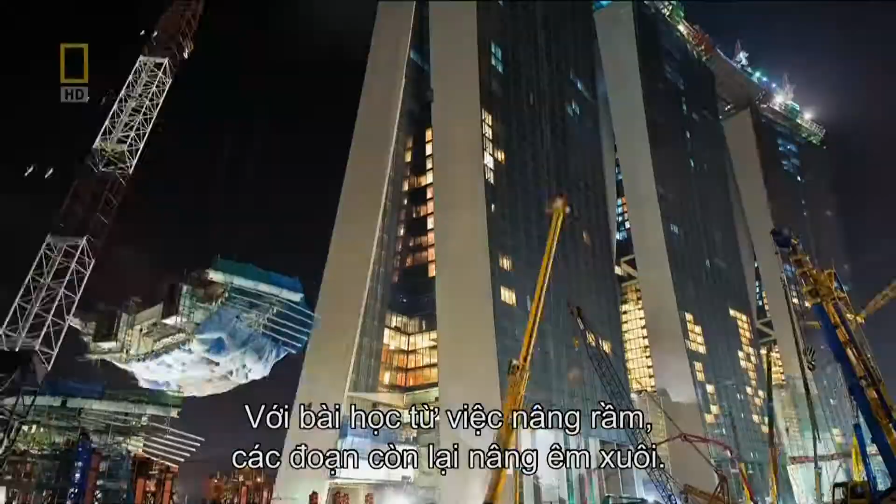Okay. After a tense 3 hours, the lightning threat passes, and the operation cranks back to life. By the time the box girders slide into position, it's past midnight. Everything went quite smooth today, so we hope tomorrow we can do the same. With the lessons learned from the box girder lift, the rest of the segments go up smoothly. As the final piece rises into place, Singapore is already marveling at the team effort behind one of the world's most ambitious building projects.

In just 3 years, engineers overcame seemingly impossible construction challenges, defeated marine clay, engineered ingenious design solutions, and survived the most debilitating financial crisis since the 1930s. As the finishing touches are put on the resort, the stage is set for an opening party, Singapore style. Those involved reflect on the project that has already far surpassed their expectations. It's a bit overwhelming, you know. I'm in the process of disconnecting the umbilical cord. It's not easy for an architect.

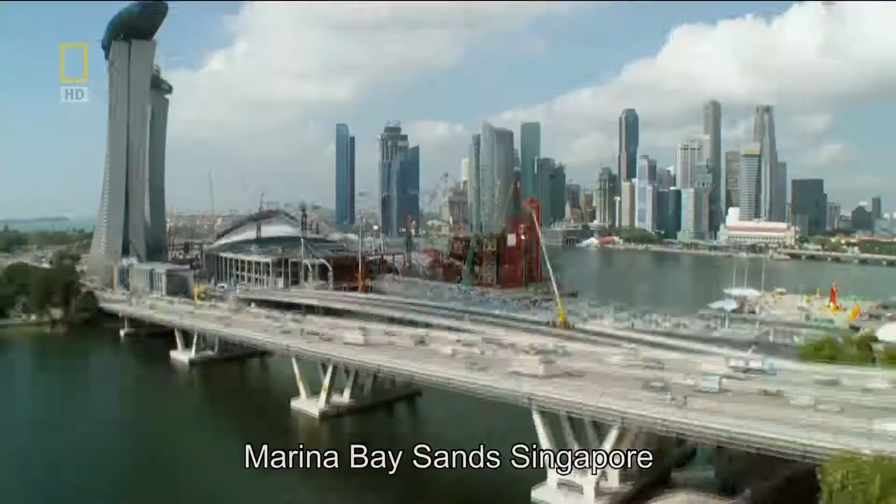This type of project probably only comes around every 25 years or so. So it's been a lot of hard work, extremely challenging. I couldn't list the number of challenges we've overcome along the way to get to today. Everybody is saying this is kind of a miracle, you know, never seen anything like it. And it's rewarding, it's nice. The Marina Bay Sands, Singapore. Proof that with visionary design and engineering know-how, megastructures can still defy the odds and fulfill the wildest dreams.